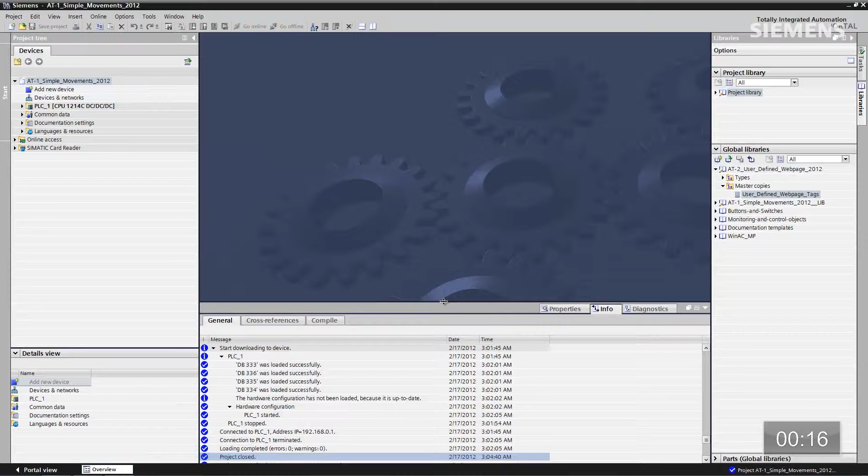Just go to the Project View section of it. I'm going to choose the PLC. Double-click on the device configuration, give focus to that CPU, click on Properties, and in the Properties, the first thing that happens to pop up is the integrated web server. If I check this box, there's a little security note that pops up that tells us, hey, wait a second, do you want to have a password? For this application, I don't want to do that.

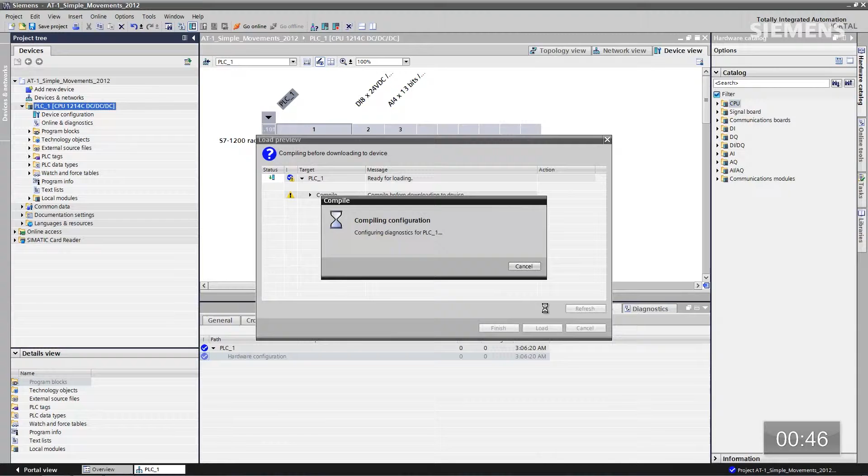All I got to do now is give focus back to the CPU and click Download. Now he's going to compile the fact that there's also a web server integrated with the code of the CPU. Click Load. Now finished. Now we have a web server integrated.

If I go over to this iPad, first thing I want to do is click on Settings, go to the Wi-Fi, enable the Wi-Fi, and as you can see, I actually do have a wireless access point for this particular project right now. It is S7-1200, that's the one I want. I'm choosing that, and next thing I want to do is go to the browser.

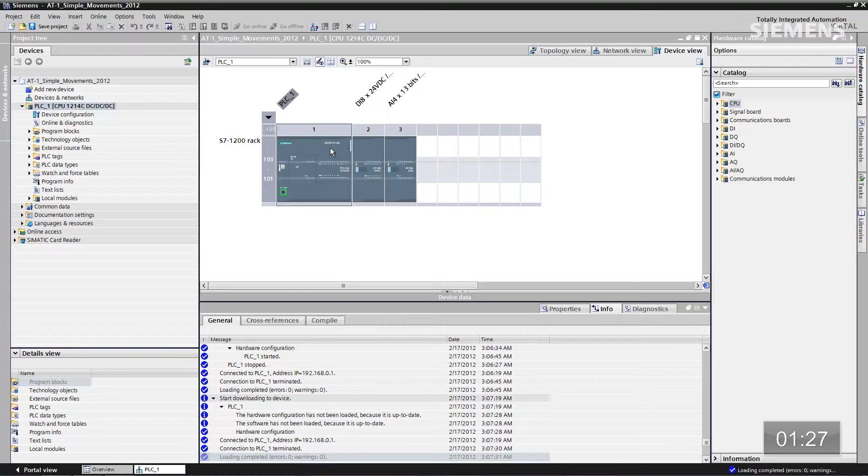I want to find the IP address for the 1200. All I have to do is give focus to it, right click, Properties, go to Ethernet address. There's my Ethernet address. Click on the field, and 192.168.0.1, go. So now I have the web server up.

If I enter it, the first page is an example representation graphically of the 1200 with the status LEDs, green, red, whatever they may be, including some basic information, IP address and part number. We've also got an identification page that gives a little bit more detail about this unit, as well as a communication page. So the next thing is we can actually create faults, for instance, with this automation system.

If I go over here and turn the potentiometer and create an analog fault, I'll notice that I get some status LEDs on the first page. Something is wrong. What I can do is go to the module information page, and I'll see some red wrench here. If I click on that, now it actually tells me that the analog module has something wrong with it. And then I can go to the diagnostic buffer, just like I would in the engineering system, and ultimately I can see I have a high limit exceeded on channel 0.

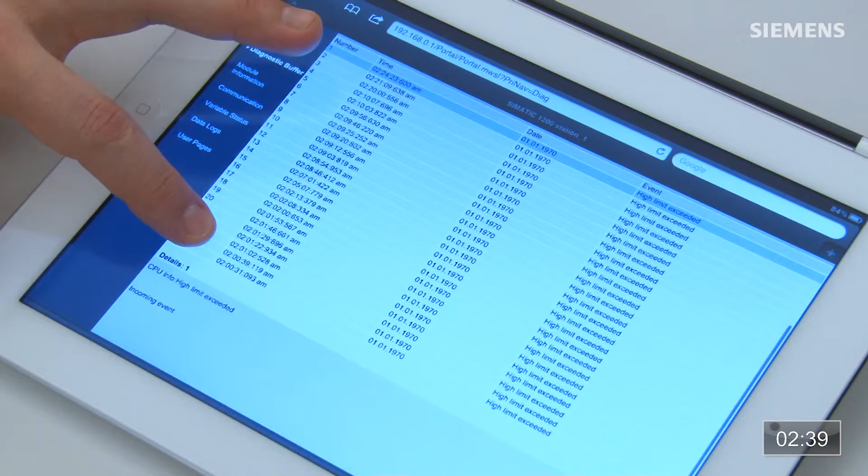Once I realize what the physical problem is, I can go back to the system, solve the problem, and then even in the web server I'll see and recognize the fault has been solved. Next thing that we can do is we can go to the variable status page, and as long as I know the tag within the control system, I can monitor any variable I want.

So let me clear this one. And let's type in one of the variables that I know for this particular program. Click Go. I can actually see the status of this particular bit. In this instance, this is motor 1. This is a seal-in circuit we have in this program. If I go over here and turn it on, I can actually see the status has changed. So you can monitor any analog, digital, bit, byte, word, whatever you want to in this particular web server.

So we're able to see all the diagnostics that a 1200 system can provide right out of the box, even in our web server. Next step is control code. Wouldn't it be great if we could tie control code directly to the current automation system and command it from this iPad? Let's do that.

First thing I want to do is go to the main OB. Here's our standard seal-in circuit. I need to tie the virtual logic to the actual logic in this particular system. What I want to do is add some ORs. So there's a normally open contact, and here is a normally closed contact. And what I want to do is tie it to our tags from our global library.

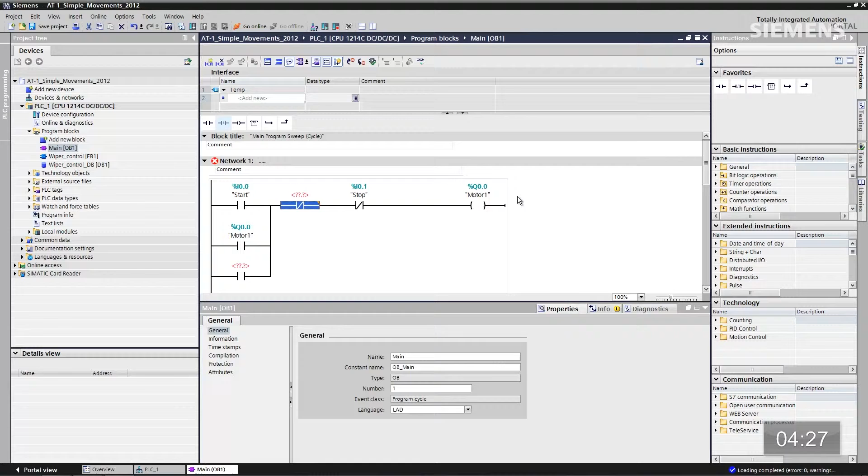What we're able to do is create HTML code for a web page. You can put that in the global library and reuse it over and over again for all of your smart devices, including the tags associated for code for those. So let me go to the library. Here's our user-defined tags. Let me pull them back into the project.

Now it physically has my tags and this code, and all I have to do is tie them together. There's the stop. There's the start. So now our virtual logic and our actual logic are now tied together. The next step is we want to add a www block because this is going to be a user-defined web page, and we want to be able to call this virtual logic against the actual logic in the CPU.

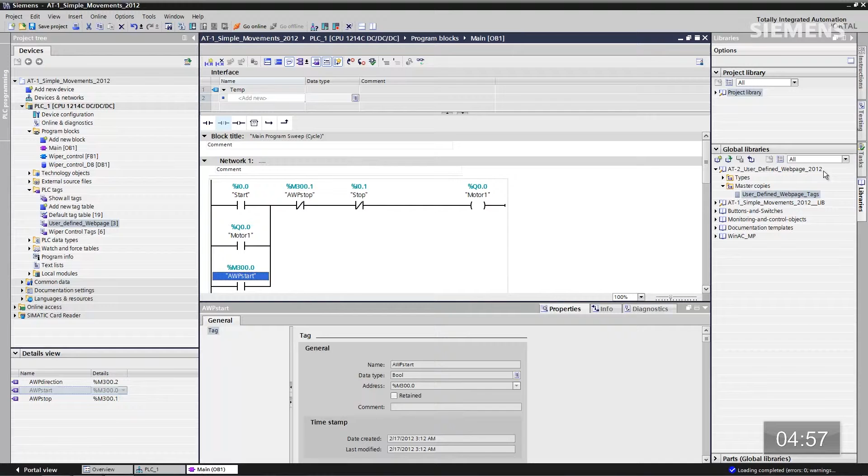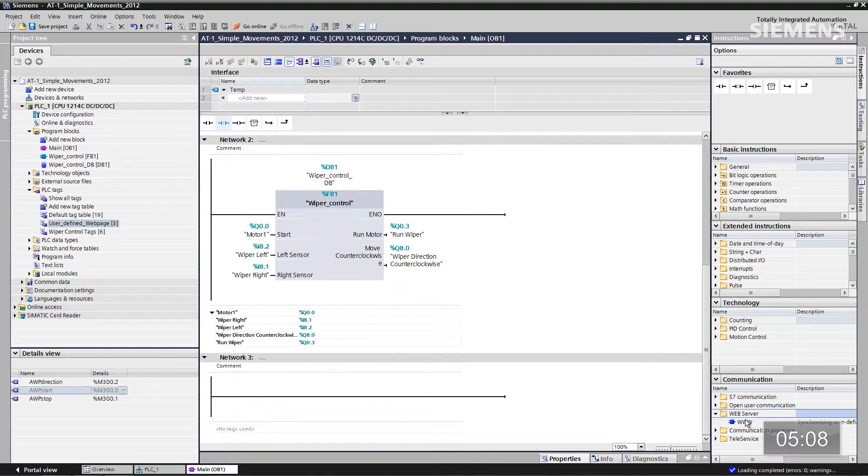Let's go to instructions, web server, and let's add this block. There's the www block. The control data block is always 333. And the output, I'm just typing in a tag name, AWP, and I'm going to use a default define tag. It's fine, whatever the default is, I'm okay with that. So now all of our logic for the control code is now complete.

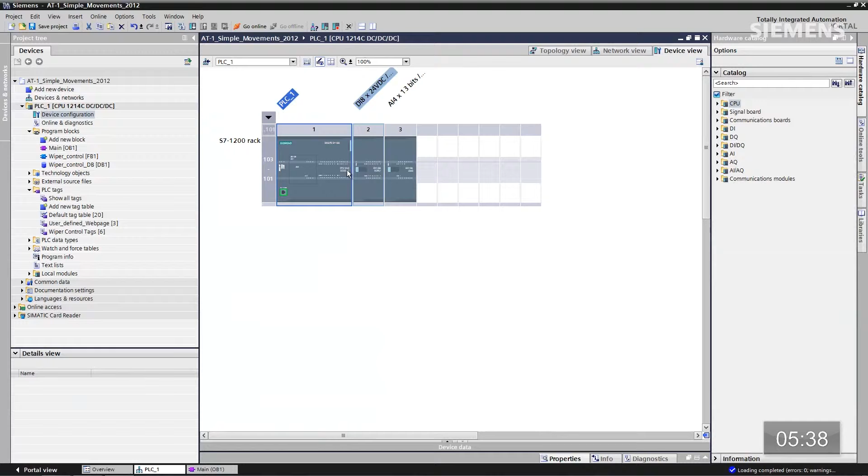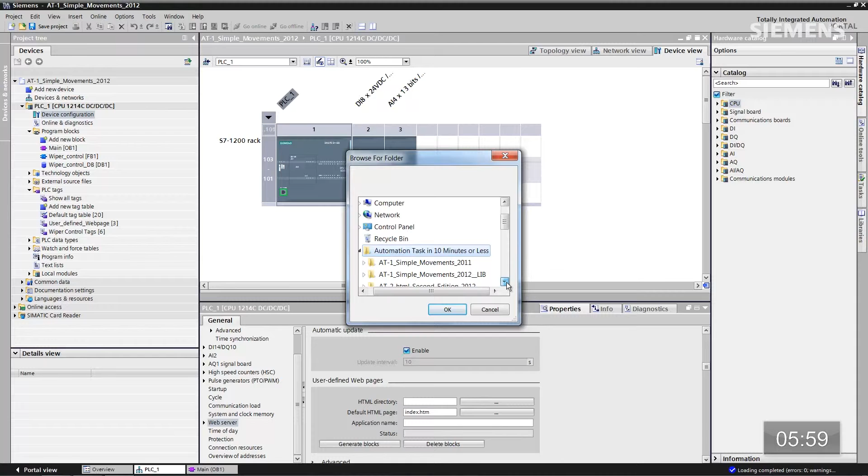Next step is the HTML actual web page itself. What we need to do is go back to the device configuration, give focus to CPU, click on Properties, and then go down to the Web Server section. And we have two fields here. The first field is the HTML directory field. So let me go find the actual point where we have this in our system. It is that one. Click OK.

And then I actually need to point to the page as well. So the page is called index. Click on Open. So now all I need to do is click this Generate Blocks button. So we'll actually generate the actual HTML code for the web server in the system itself, and we'll put it into the actual project. Now that they're there, all I have to do is give focus to CPU, download that.

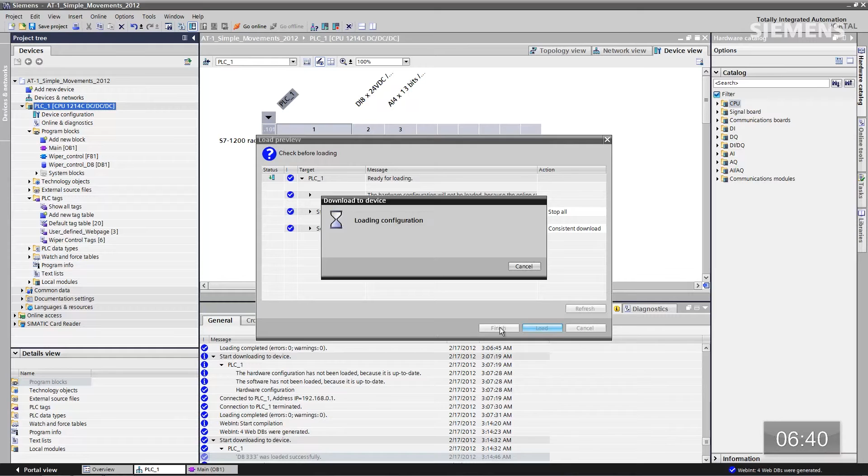Now it's going to compile the user generated web page along with the code. Click Load. And then last but not least, we can click Finished, and we should have a fully functional system. So now the code has all been downloaded to the CPU. All we have to do is go over to the iPad. Let's refresh the standard web page. I can choose User Web Page at the bottom and launch it.

Now I have my user-defined web page for control functionality. I have a logon screen as well, which we didn't create a login, so we don't need to use it. And we got a control screen as well. I can click on Start. And as you can see, I can completely control this automation system with this iPad, and I did it in just a matter of minutes. Now that is engineering efficiency.